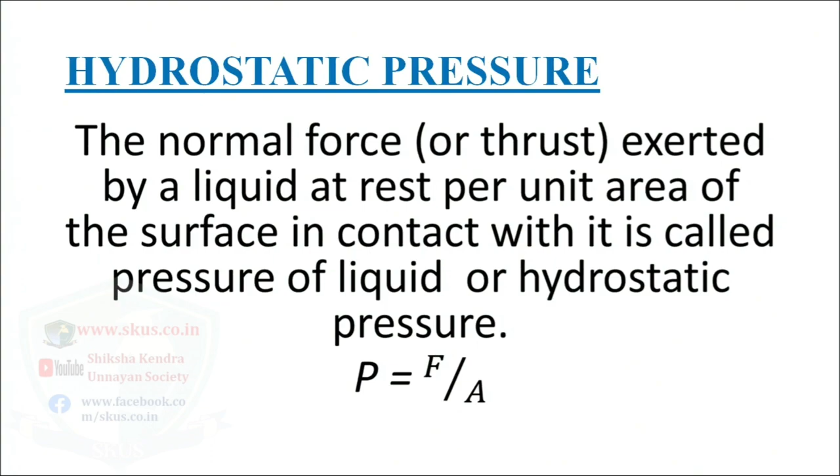Therefore, we can say that the normal force exerted by a liquid at rest per unit area of a surface in contact with the fluid is called pressure of liquid, most famously known as hydrostatic pressure. The pressure is given by force per unit area. The emphasis is that the applied force is normal to the surface of an object which is in contact with the fluid.

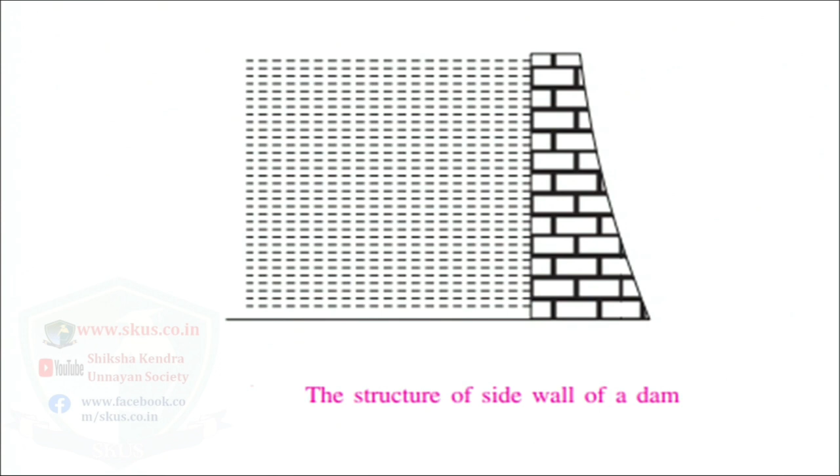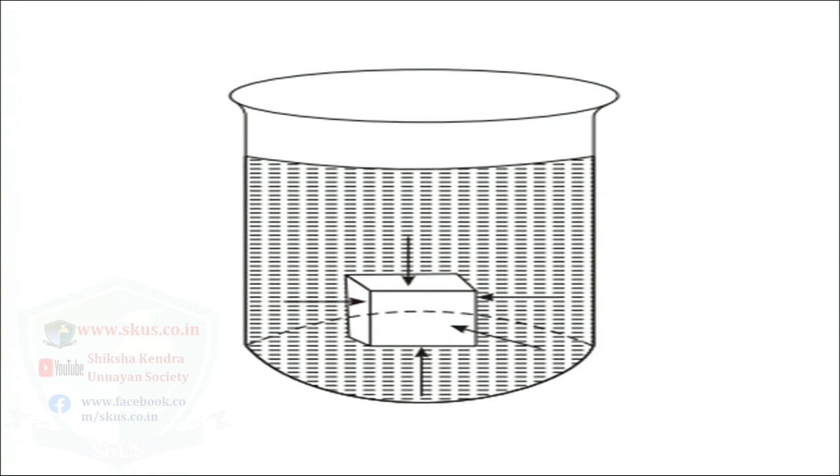In this diagram, we try to explain that when a jar is taken which is filled with water till a certain height and a cube having a symmetric surface is dipped into that water, the water applies normal thrust on each surface of that cube, where F is a normal force and the surface area is given by capital A of an object which is in contact with the liquid.

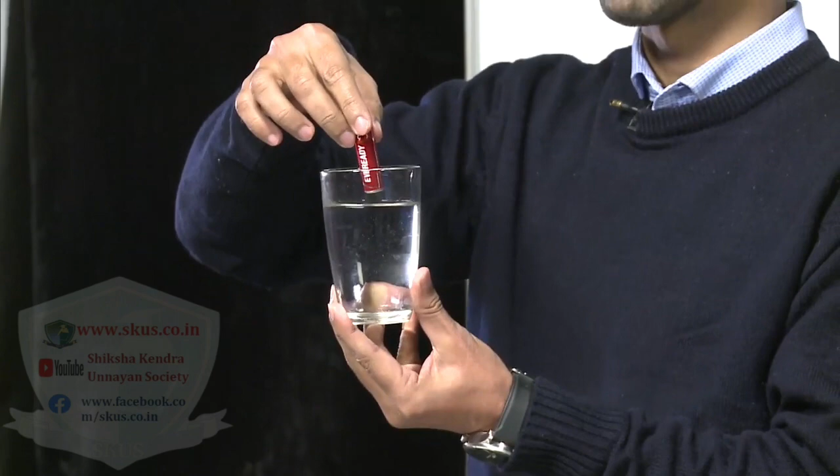Now we can demonstrate the same example that has been denoted by the diagram by using a glass filled with water till a certain level. When I release this cell on the surface of the water which is at rest in the glass, it will dip till the bottom of the jar.

Now you can see the cell is not moving anywhere, and through this we can analyze that the water which is at rest is applying the force at every side, at every surface of this particular shape. Through this, we confirm that yes, when the liquid is at rest, it applies pressure in equilibrium condition on every surface of its shape.

The unit of pressure is given by Newton per meter square or Pascal, and the dimensional formula is given by M L^-1 T^-2. Next, we will see what would be the hydrostatic pressure at a point inside a liquid. We will consider a liquid in a container and an imaginary right circular cylinder of cross-sectional area denoted by capital A and the height h.

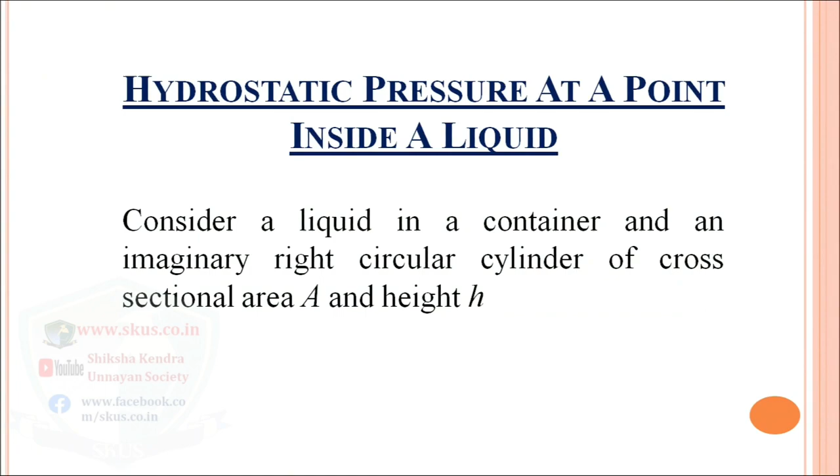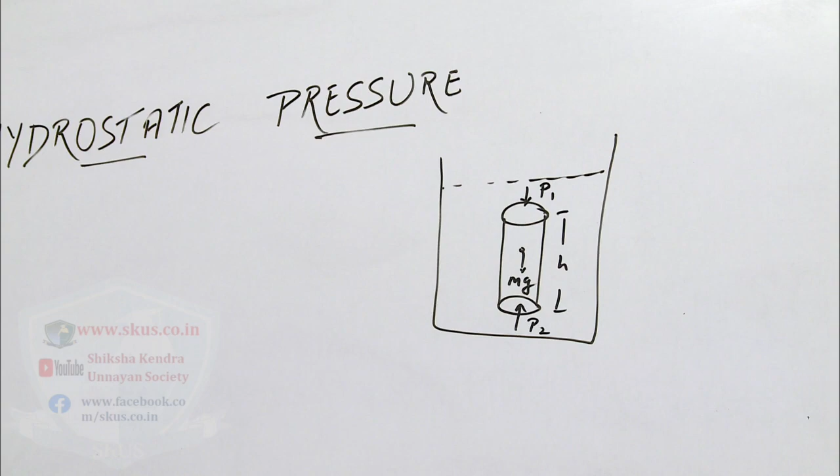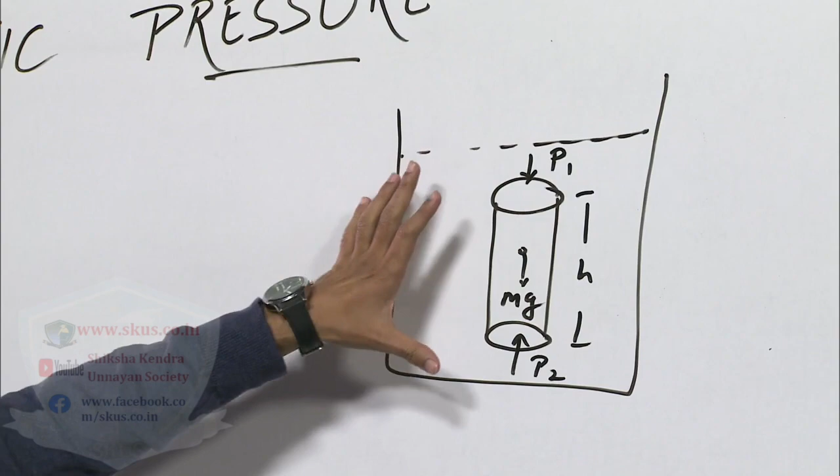We have plotted a diagram giving the condition of hydrostatic pressure. The cylinder in this condition is in a state of equilibrium. Here we can see when the cylinder is in equilibrium condition, there is the pressure exerted from above, and the upward thrust by the liquid is at the lower bottom side. Since the object has its own height, it will also have its own mass, which is attracted by gravity.

Since it is in equilibrium condition, therefore, we can say that the total force applied is equal to 0. At the upper side, the total force is given by F1, and in the same direction, the mass into gravity product is given, and from the lower side, an upward thrust is applied, given by F2.

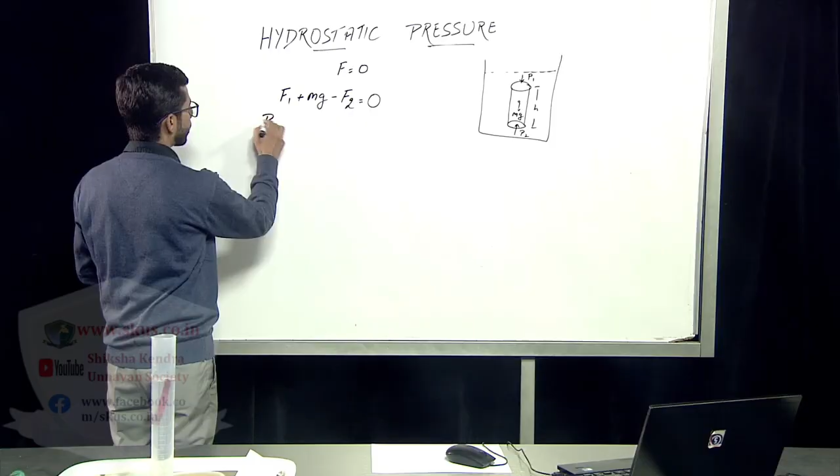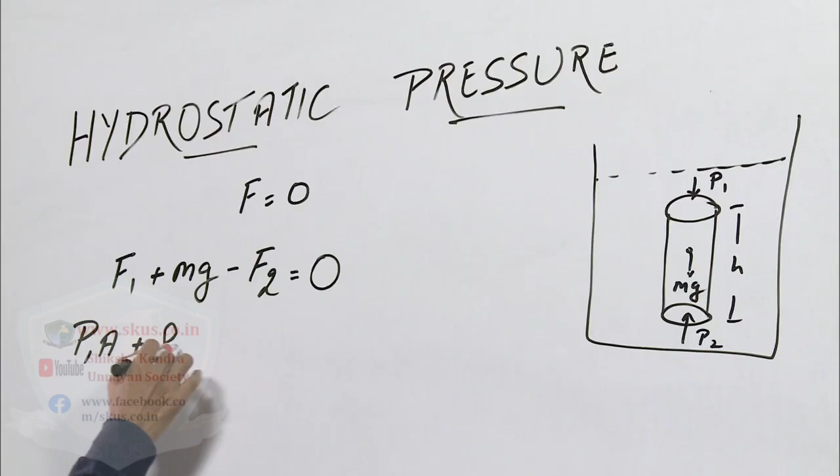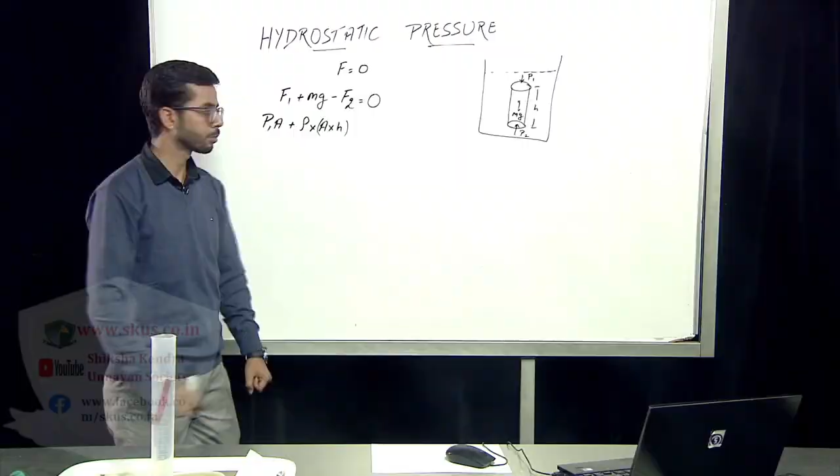Now, in terms of pressure, we need to elaborate this equation, and force is given by the product of pressure into area. Mass is nothing but the product of density of an object into the volume, where the volume can also be elaborated as the product of area into height of the cylindrical object. And minus F2. As you can see from this equation, area is a common term which will cancel out.

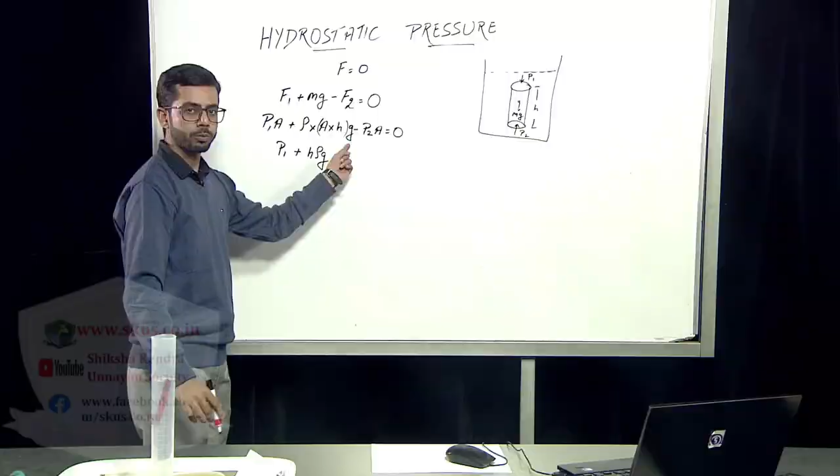This term G is due to the availability of the weight. Therefore, we need to multiply G in this equation also. And the leftover term is given by this. When we try to solve this equation, the answer is given by

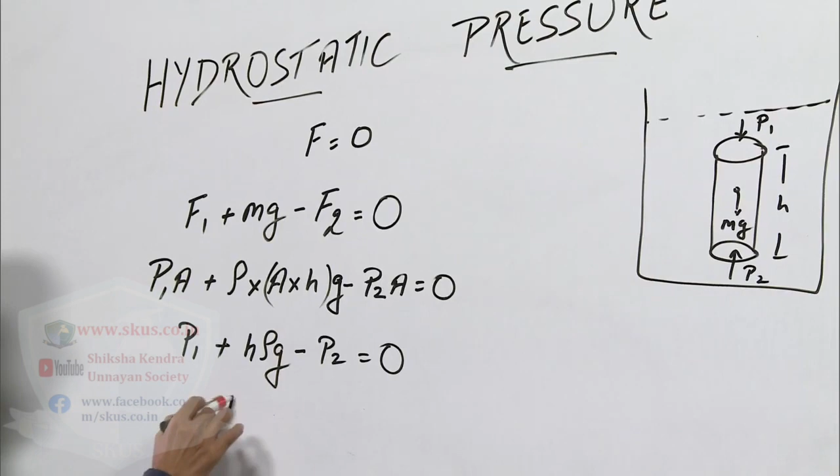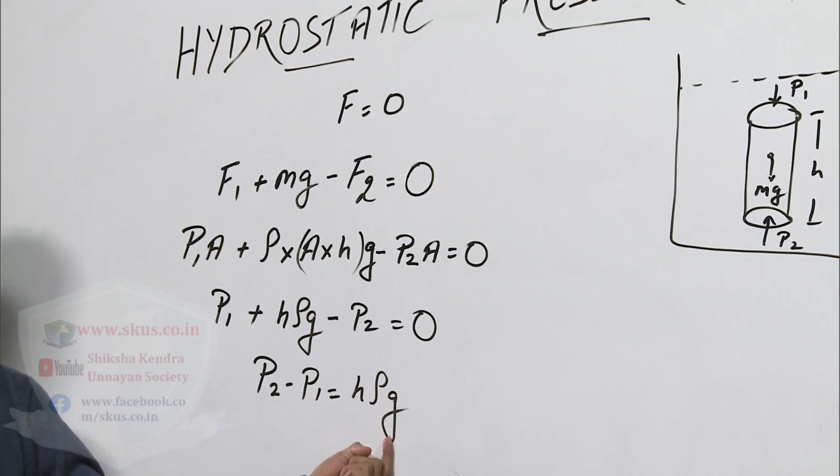therefore, the pressure implied by the liquid is given by the pressure difference for the upward thrust implied by the liquid, the pressure at the upper surface area, which is the solution for the product of height of the cylindrical object, the density, and the gravity. We got the conclusion that pressure difference is given by h into rho into g, and it is due to a fluid which increases linearly with the depth.

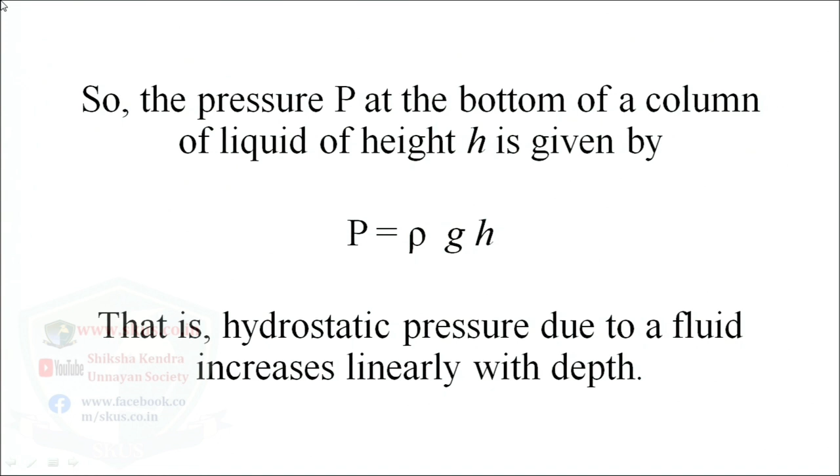If we consider the upper face of the cylinder to be at the open surface of the liquid, I can say P1, the upper surface pressure, is replaced by the pressure of the atmosphere. And again, by considering the same difference, you will get the same answer, which again depends on the height of the object. Pressure does not depend on the shape of the vessel.

And to prove it, we are showing this diagram. Here you can see there are different shapes of the vessel, but the level of the water is the same. And we know that the pressure is given by the product of height, the density of the liquid, and the gravity. Therefore, in all the five apparatuses, the pressure is same.

We had already denoted the amount of pressure at certain points, and they are denoted by the points A, B, C, D, and E. And at those points, the amount of pressure implied by the liquid is the same.

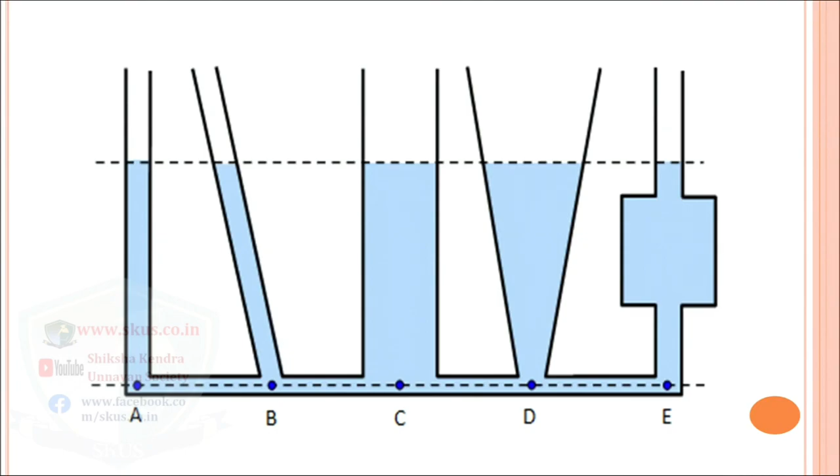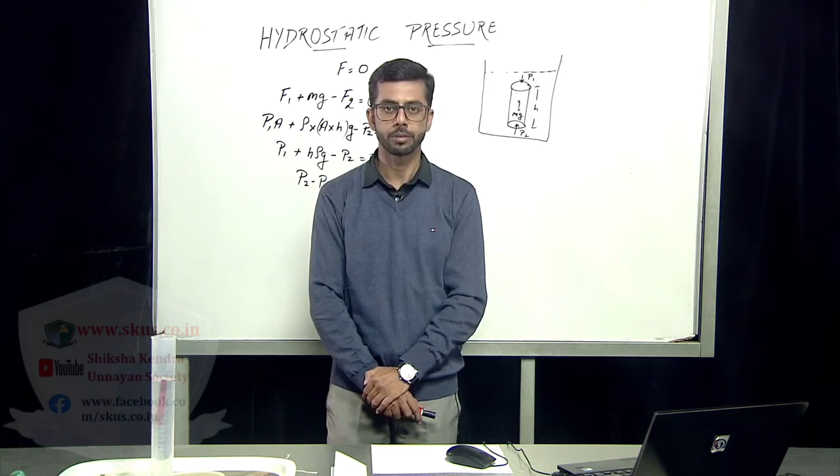Till now, what we had learned is that hydrostatic pressure exists with the variation of height, and it also depends on the lower and the upper surface area of an object, and pressure does not depend on the shape of the vessel. Thank you.

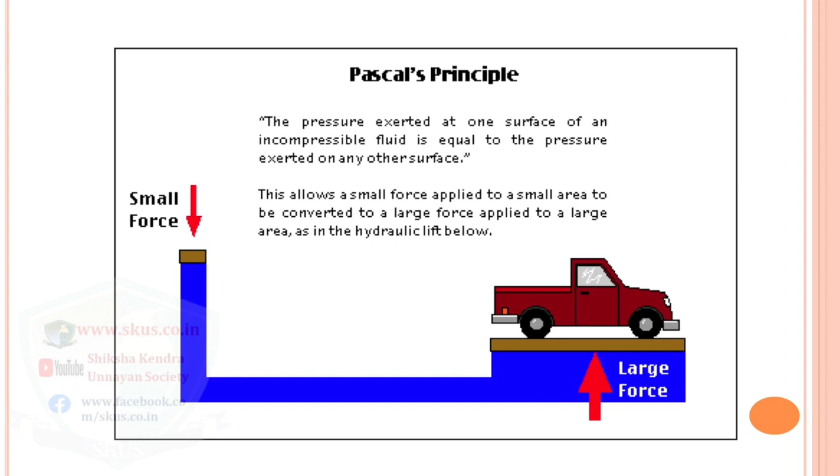Here we analyze the smaller force exerted on one side, and on the other side the area and the force are large. It is implied by using Pascal's law. What does it state? It states that if pressure is applied at any part of an enclosed liquid, it is transmitted undiminished to every point of the liquid as well as to the walls of the container. Means there will be no loss of pressure anywhere inside the container.

Now look at the smaller side. At the smaller side, we have a pressure given by F1 by A1, the ratio of both quantities, which must be equal to the pressure on the larger side, given by F2 by A2. We already know that the transfer of pressure is undiminished. That's why both pressures are equal to each other. And it is then very easy to lift any heavy object by using a very small amount of force on one side.

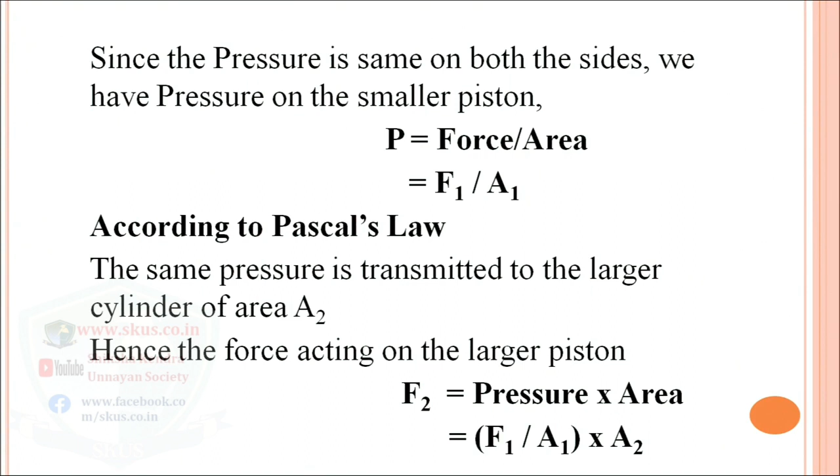Now, according to Pascal, as we already explained, it is denoted mathematically as the last equation, F2. F2 was the amount of force exerted on the larger side of the area. Here, the pressure is exerted in terms of the smaller side. So the pressure is given by F1 by A1, and for the larger side by F2 by A2. Therefore, when both quantities are equal, by cross multiplication of the two equations, we got this result. And this is the actual mathematical concept behind Pascal's law. This law is also known as the law of transmission of liquid pressure.

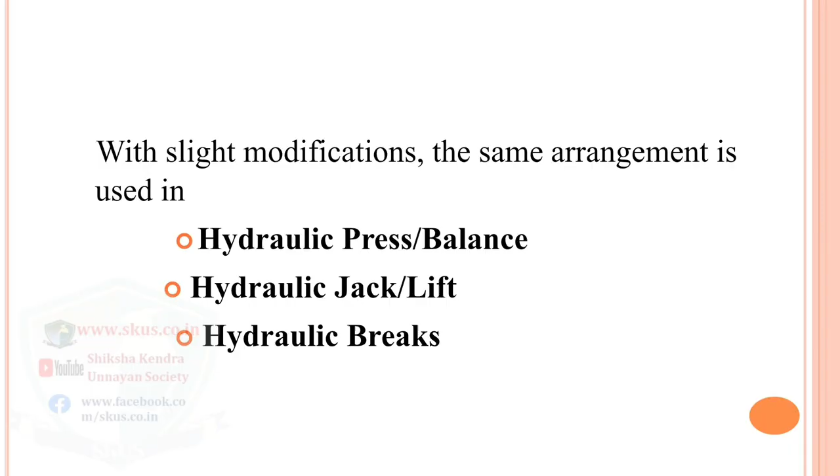Now, turning towards the applications, the basic uses are the hydraulic press, the hydraulic balance, and the hydraulic jack. The very first application that we had already shown you is the hydraulic jack. Here, we again gave a detailed demonstration of how we get a small force on one side and a larger force on the other side of the platform, which is connected through the liquid. And we are easily able to lift the car placed over the platform.

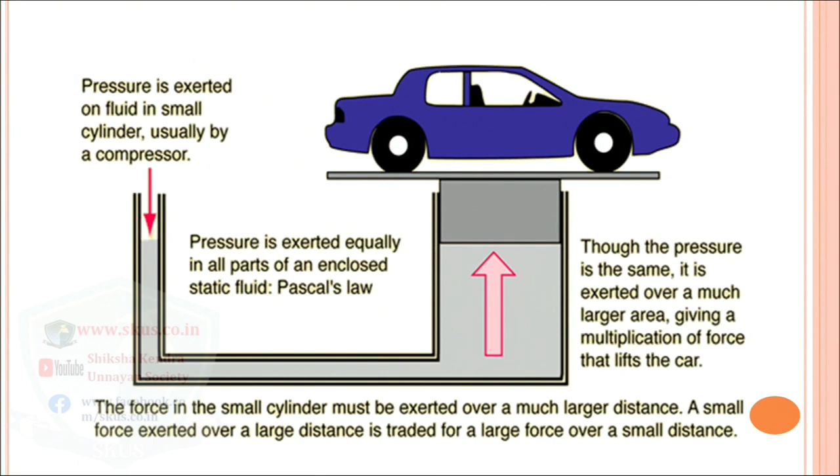So the force in the small cylinder must be exerted over a much larger distance. A small force exerted over a large distance is traded for a large force over a small distance. This is somewhat an inverse case. So a small force will turn out to be a larger force on the other side.

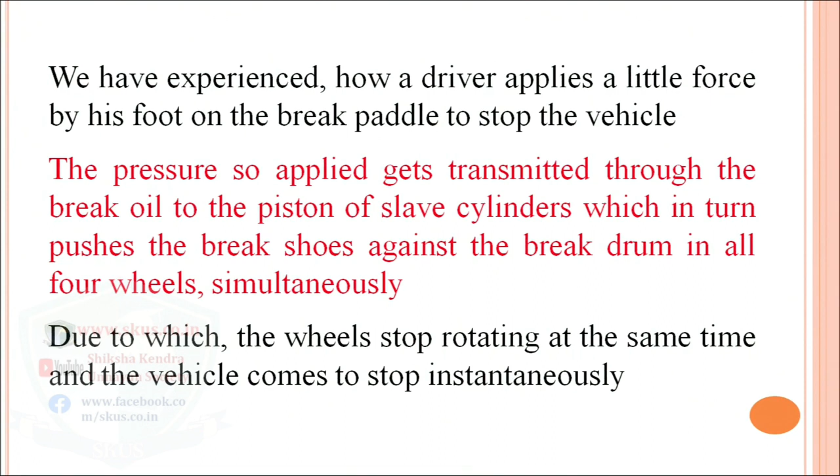Then the hydraulic brakes. The hydraulic brake is used basically in vehicles or four-wheelers, where the pressure applied gets transmitted through the brake oil to the pistons of the slave cylinders, which in turn push the brake shoes against the brake drums in the four wheels simultaneously. Then the wheel stops rotating and the vehicle comes to a stop.

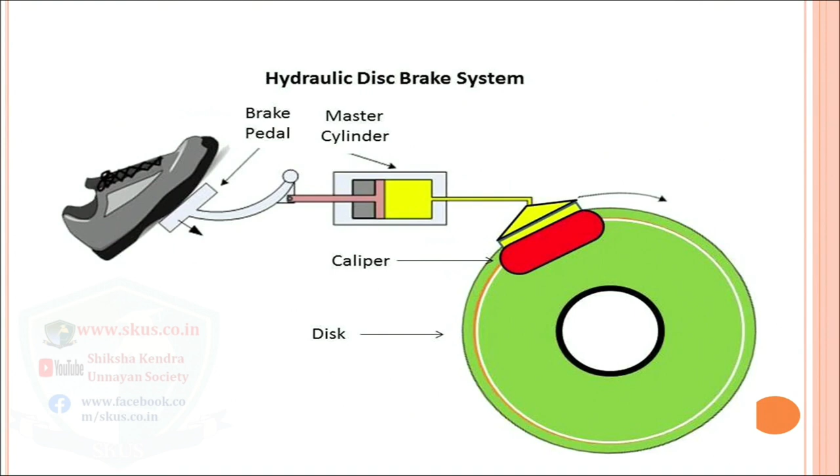Here is a demonstration. The foot shows the brake pedal, which is connected to the master cylinder where the fluid or brake oil is inserted, which is interconnected to the caliper and the disc. When this caliper engages the disc, it acts against the rotation of the wheel and it gets stopped.

So till now we have learned what Pascal's law actually is and what the applications of Pascal's law are. Thank you.